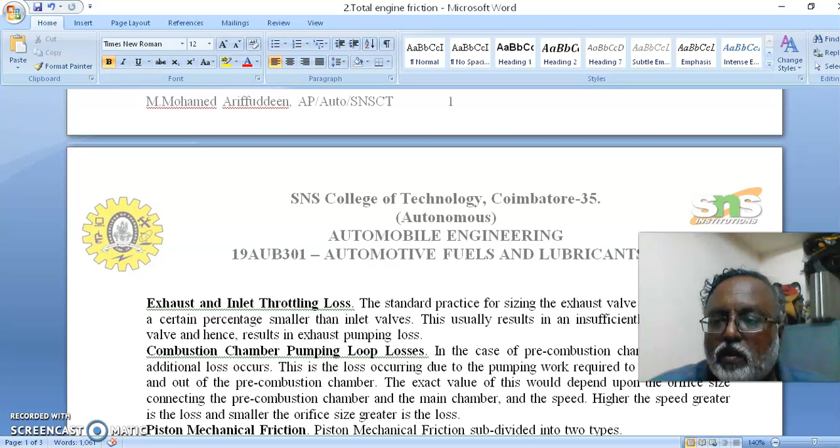Let us continue the session where we left. We were discussing a lot of things on friction. In this session we are going to discuss the effect of engine variables on the engine friction.

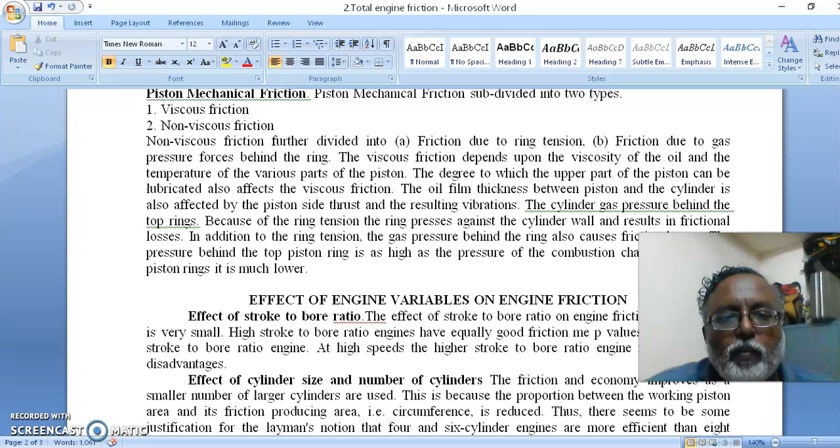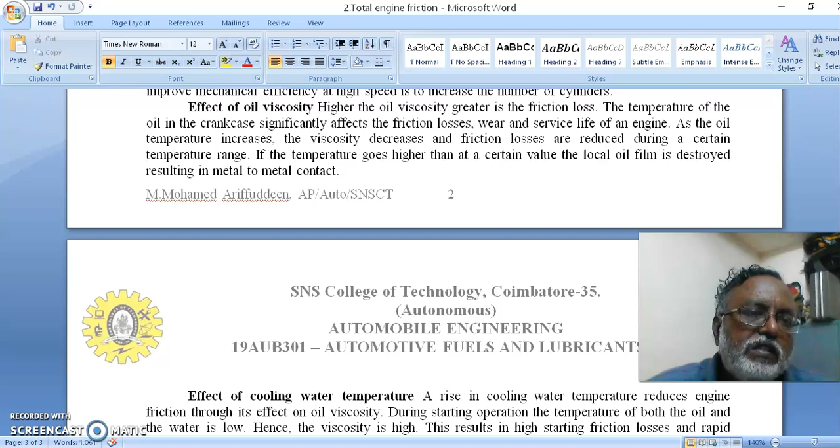Let us consider a few variables which are affecting the friction. The first one is the effect of stroke to bore ratio. The second one is the effect of cylinder size and number of cylinders. The third one is the effect of number of piston rings.

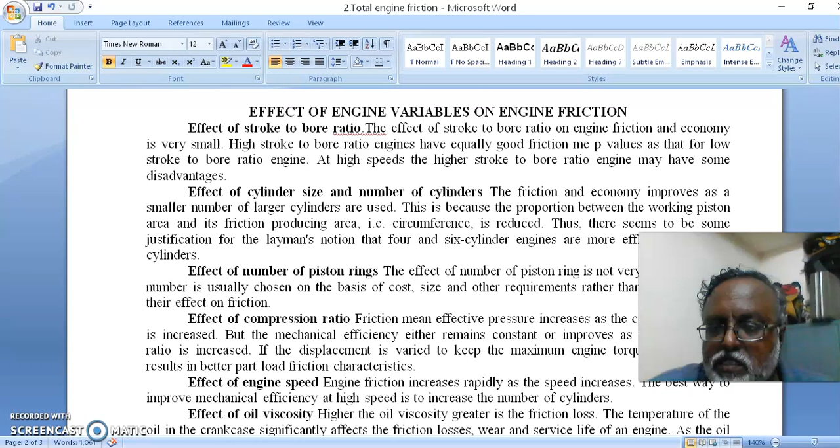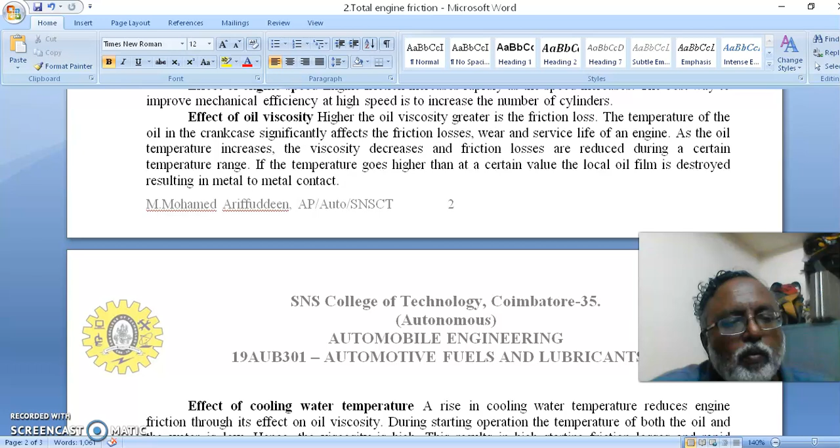The fourth one is the effect of compression ratio. The fifth one is the effect of engine speed. The sixth one is the effect of oil viscosity. The seventh one is the effect of cooling water temperature. The last one is the effect of engine load. Let us consider them one by one.

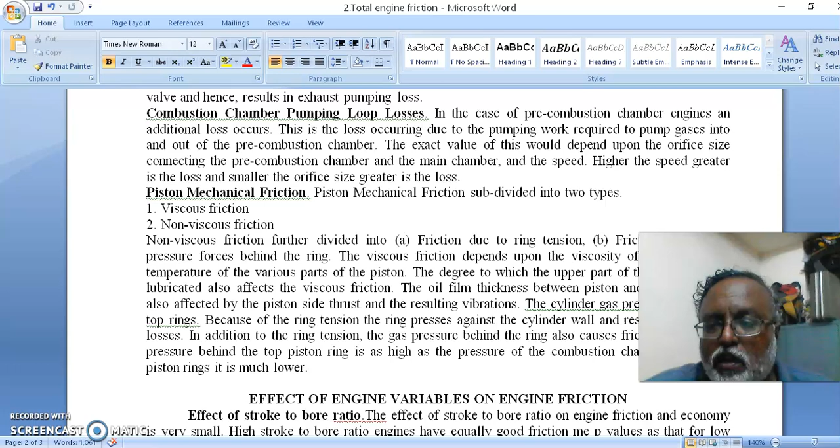The effect of stroke to bore ratio on engine friction and economy is very small. High stroke to bore ratio engines have equally good friction as that for low stroke to bore ratio engines. At high speeds, the higher stroke to bore ratio engine may have some disadvantages.

The second one is the effect of cylinder size and number of cylinders. The friction and economy improves as a smaller number of larger cylinders are used. This is because the proportion between the working piston area and its friction producing area, that is, circumference, is reduced. Thus, there seems to be some justification for the layman's notion that 4 and 6 cylinder engines are more efficient than 8 cylinder engines.

The third one is the effect of number of piston rings. The effect of number of piston rings is not very critical, and this number is usually chosen on the basis of the cost, size and other requirements rather than on the basis of their effect on friction.

The effect of compression ratio: the friction mean effective pressure increases as the compression ratio is increased, but the mechanical efficiency either remains constant or improves as the compression ratio is increased. If the displacement is varied to keep the maximum engine torque constant, the result is better part load friction characteristics.

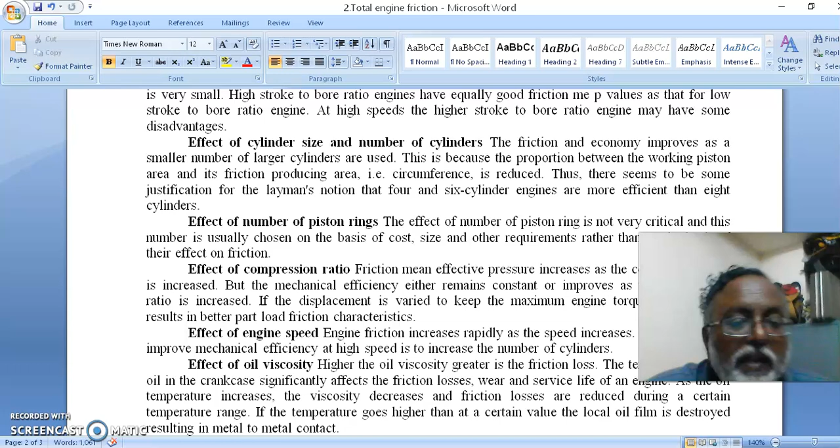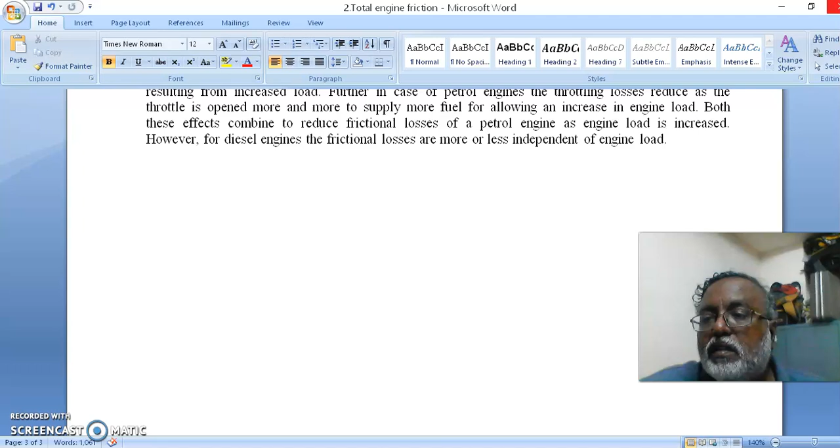The effect of cooling water temperature is another thing we need to consider. A rise in cooling water temperature reduces the engine friction through its effect on oil viscosity. During starting operation, the temperature of both the oil and the water is low, hence the viscosity is high. The result is high starting friction losses and rapid engine wear.

Finally, the effect of engine load. As the load increases, the maximum pressure in the cylinder has a tendency to increase slightly, thus resulting in slightly higher friction values. However, this increase in the friction loss is more than compensated by the decrease in the oil viscosity due to higher temperature resulting from increased load.

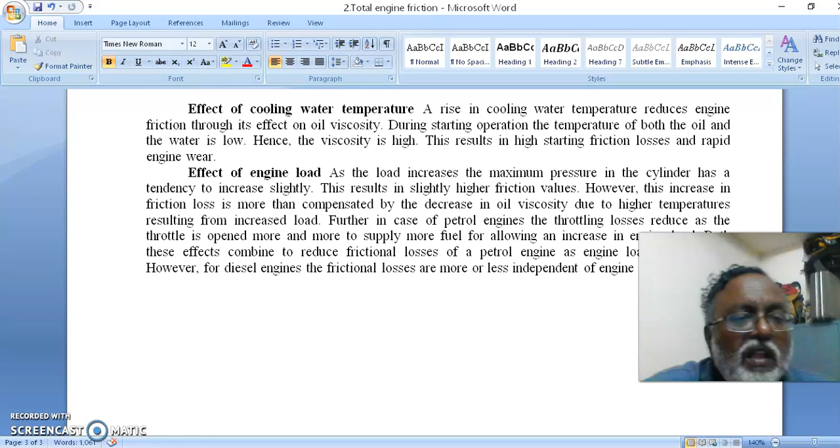Further, in case of petrol engines, the throttling losses reduce as the throttle is opened more and more to supply more fuel for allowing an increase in engine load. Both these effects combine to reduce the frictional losses of the petrol engine as engine load is increased. However, in the diesel engine, the frictional losses are more or less independent of the engine load.